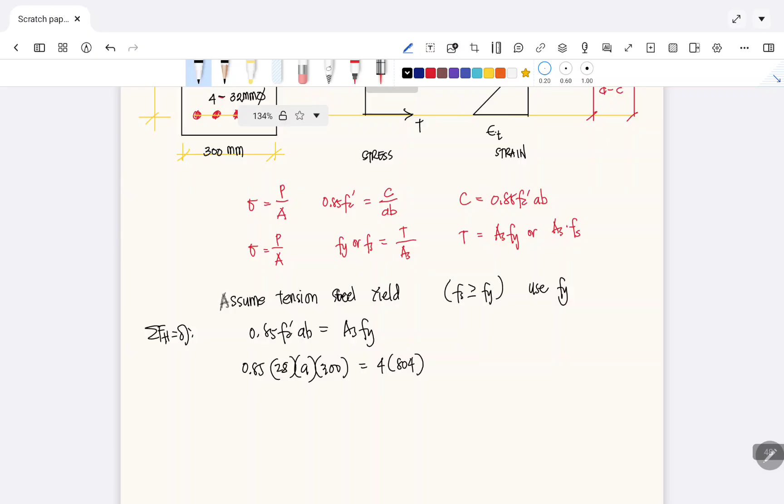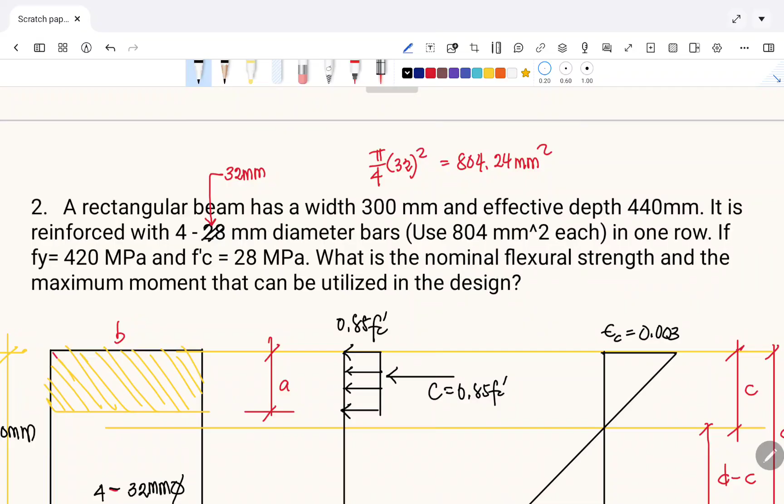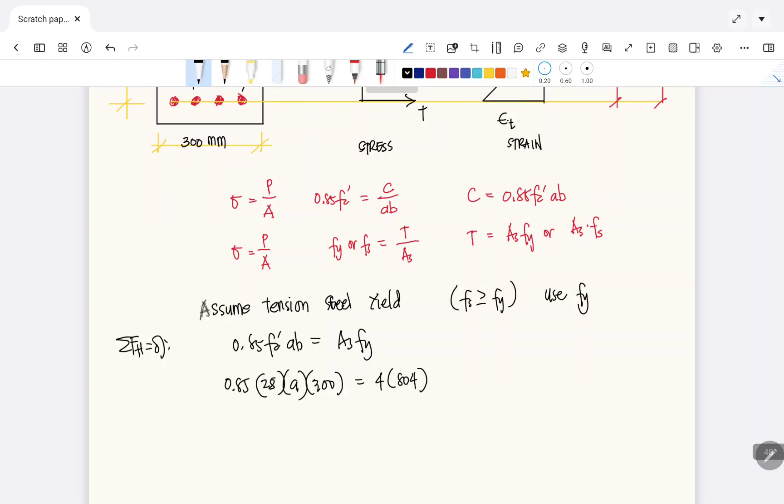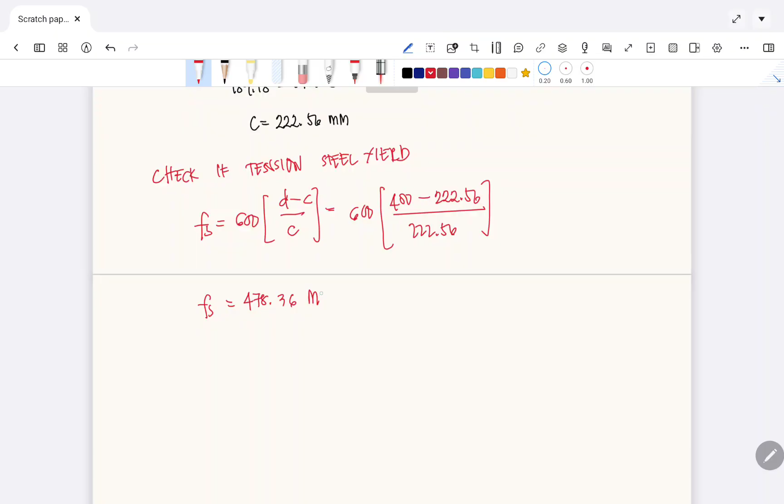So, As then Fy. What is the value of Fy? 420. So, let's say this is 420. Then we can now solve for the value of a. Okay, so fs is 478.36 megapascal. So let us compare that to our Fy. What is our Fy? Our Fy here is 420 megapascal.

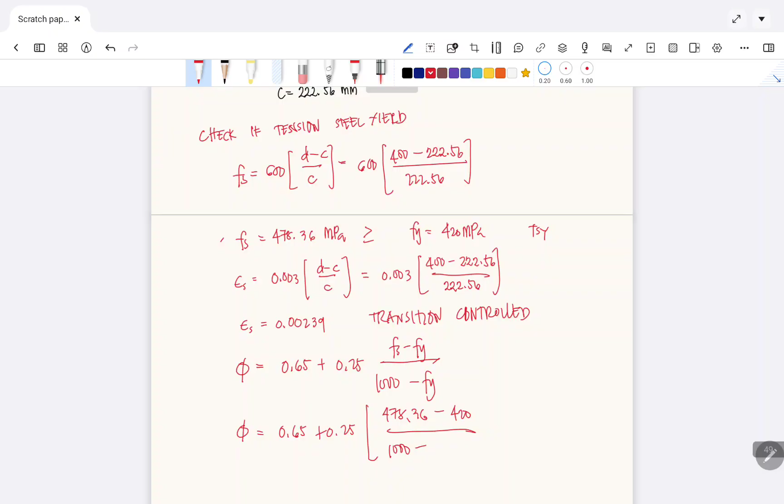Okay? So to solve for the value of our phi, 0.65 plus 0.25. What is the value of fs? Ito, na-compute na natin: 478.36 minus 420, value ng fy, over 1000 minus fy. Ang value ng fy natin ay 420 megapascal. So let's compute for this. Okay, so the value of our phi is 0.6751.

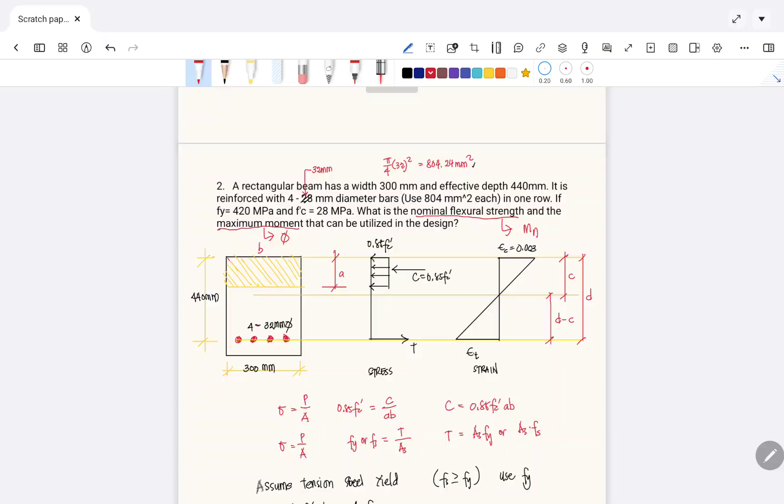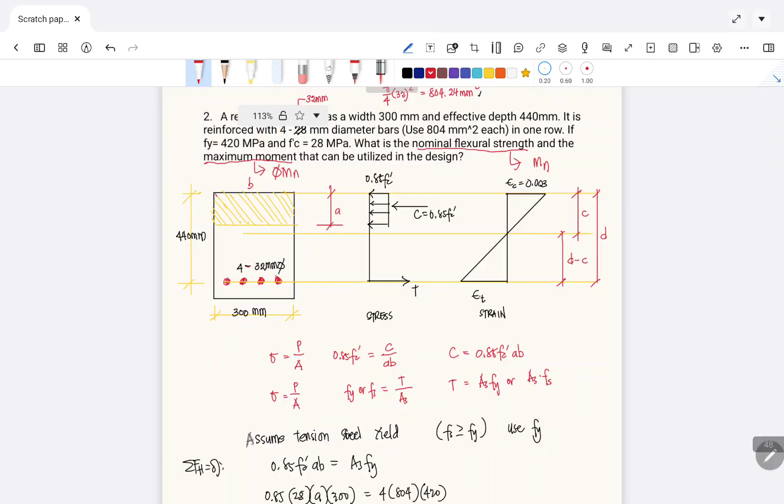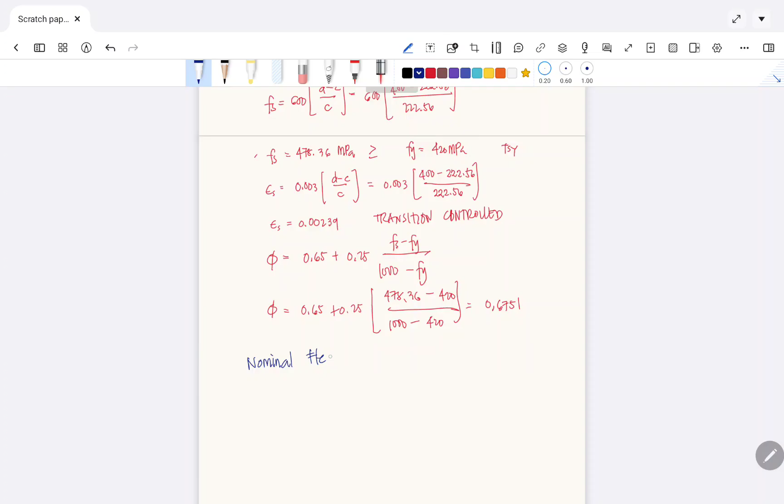Okay, so ibig sabihin tama yung value ng a and c. So therefore we can now proceed for the nominal moment capacity, since yun yung unang tinatanong. Nominal flexural strength or the nominal moment capacity, that is the value of Mn, and the maximum moment that can be utilized, that is phi Mn. So kailangan natin yung value ng phi dyan. So in this problem, we can solve for the nominal moment capacity or the nominal flexural strength, and at the same time the maximum moment. Okay, so for the value of the nominal moment capacity, nominal flexural strength, the value here is Mn.